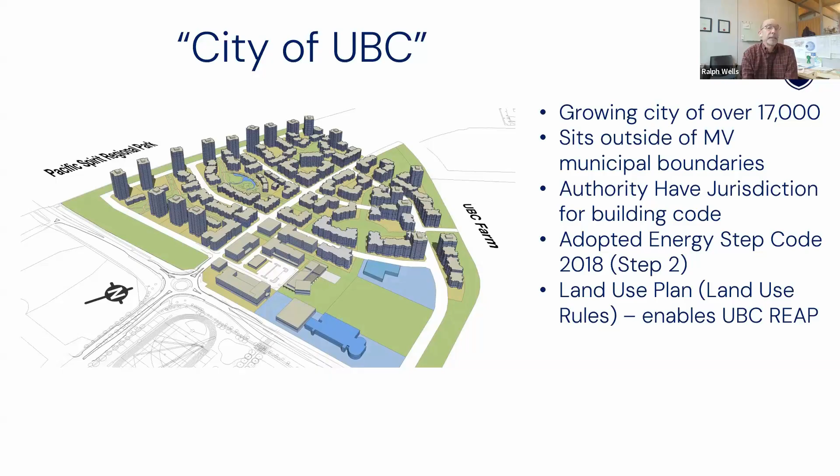First, just noting we are an authority having jurisdiction for building code, and very pertinent to today, we've adopted Energy Step Code. We adopted Step 2 in 2018. Then lastly, I guess this is the key point, through a land use plan agreement we have with the province of BC, we've been given municipal authorities through MEVA, the same municipal enabling legislation that gives other cities their authorities. But it allows us to develop something called land use rules, so we can go a little bit beyond building code, for example. And that brings authority to our development handbook, but most importantly for today, it brings authority to something we call the UBC REAP.

I'm not going to talk too much about REAP, but it's key for us. The Residential Environmental Assessment Plan is really a comprehensive green building system that governs construction of the residential community. It's very holistic though, LEED-like in terms of its comprehensiveness. We have a broad range of component areas here, ranging from biodiversity to climate adaptation, quality, health, and well-being, for example. And it is a regulatory tool, even though it looks LEED-like, and there's many preconditions as well as optional points that developers need to choose from to reach certain target thresholds.

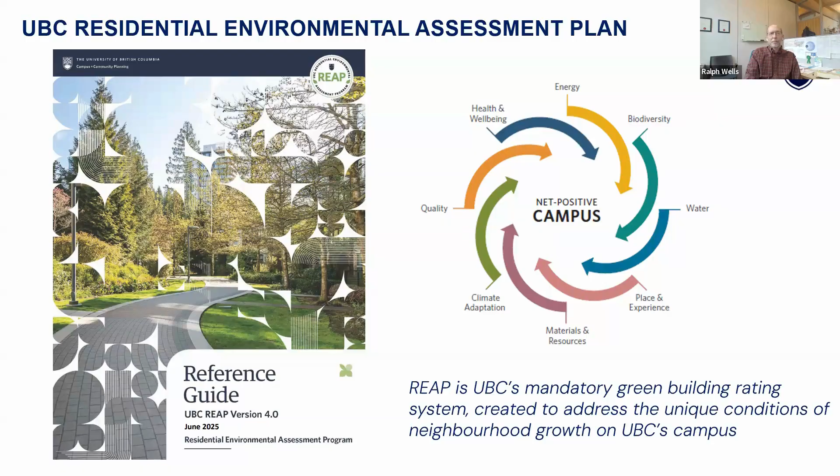But I'm not going to talk anymore about REAP as much as I'd love to. I encourage you, if you're interested, just Google UBC REAP and you can learn lots more about it. But the key part I'll share with you is on the next slide.

As I mentioned, we adopted Energy Step Code in 2018, and in June of 2024, we moved to Step 3 as our base code to stay ahead of the base code for the province. We also then in June 2025, just recently, adopted Zero Carbon Step Code EL4 for all new residential construction on campus. And here's the other key piece: because we're able to, through REAP, we've also introduced a 10% embodied carbon reduction target. So all new construction will have to meet that target as well.

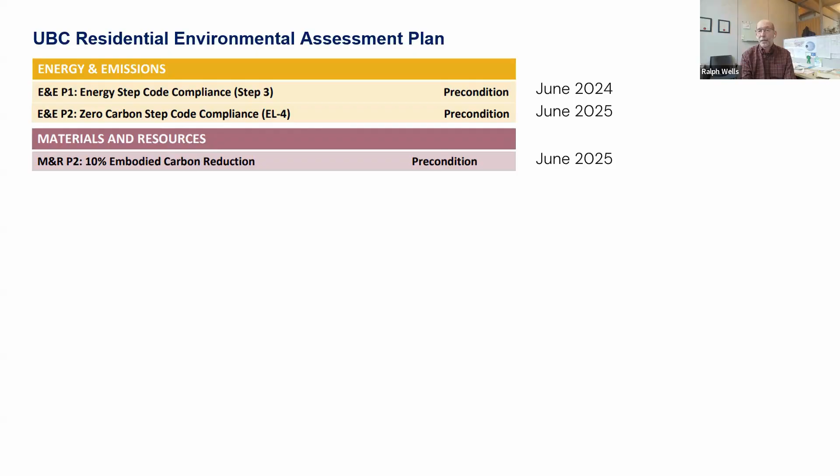And we're not stopping at 10%. That's where we're starting. Our climate action plan for the neighborhood commits us to a 40% reduction by 2030. And of course, UBC's climate action plan, like many jurisdictions, commits us to net zero by 2050. So even 40% is only a stopping point on the roadmap. All of that to say, we're really interested in the question of understanding the relationship between Energy Step Code, Zero Carbon Step Code, and embodied carbon reduction.

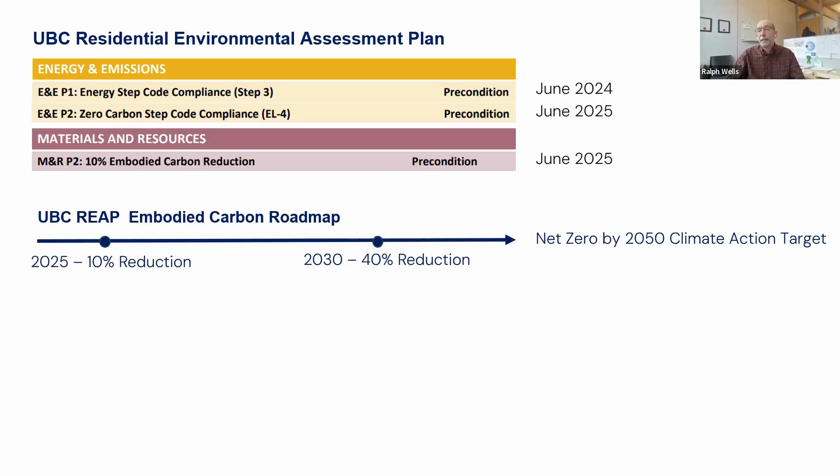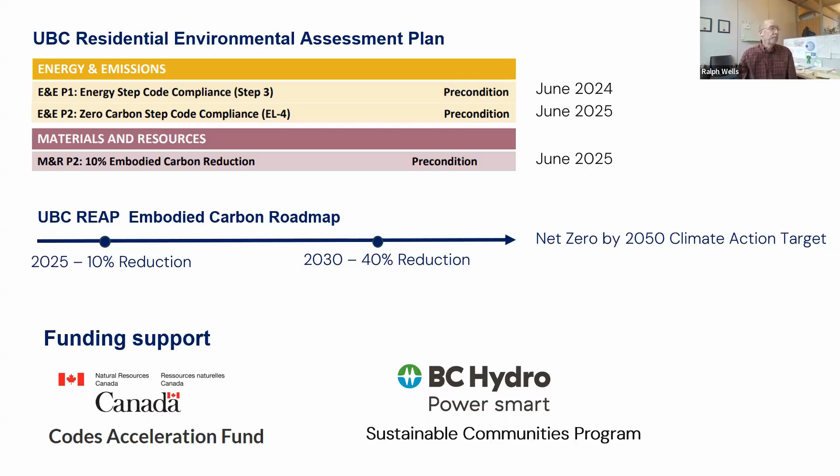And then finally, I just want to acknowledge funding. Very excited and happy that we were able to receive an NRCan Codes Acceleration Fund grant in order to explore these questions and develop our energy, zero carbon, and embodied carbon roadmap. I also want to acknowledge funding from BC Hydro, who are also very interested in understanding the relationship between energy efficiency, which is their core mandate, and embodied carbon. So that's the context. I'll hand it back over to Hugh, I believe, to take you through the fun stuff.

Sorry, Martina, we're still there. Yeah, my apologies. No worries.

So just to also put it into context of the current code landscape, also outside of UBC and the relevance of the study: for those who've been around for some time in this space, it has been a very rapid evolution of energy and carbon code adoption in BC since 2008, when we had our first ever energy code in BC, which was MNECB 1997. Lots have happened since that time.

But one significant milestone, I would say, is in 2017 when the BC Energy Step Code came into place. And with that came the TEDI metric, the thermal energy demand intensity, measuring the heat load on buildings. So what that did is really put a much needed focus on the thermal envelope for improving energy efficiency, and this has had a significant impact on our local industry practices for the better.

But what we're starting to see now on projects, as we layer in the higher steps of the BC Energy Step Code, Step 3, Step 4, the higher levels of the Zero Carbon Step Code, all-electric projects, and embodied carbon, we're starting to reach a point of diminishing returns, particularly on the TEDI metric. So what that means is we've found that aiming for low TEDI overall is starting to level out carbon impact if you look at it holistically, and in some cases, it's actually making it worse.

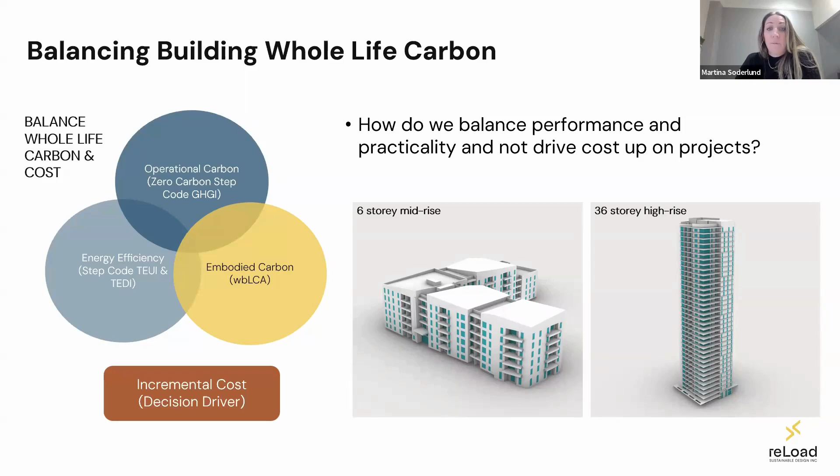So to help study that, we have looked at two MURB archetypes: one 6-story wood frame mid-rise and one 36-story high-rise concrete tower. We picked these two typologies because they are currently being built at UBC campus and are also part of their neighborhood plan development looking into the future. We also see these typologies built in the marketplace elsewhere. I do want to mention that these are not phantom models for research—they are rooted in real-life projects that were used as base case studies.

So just to give you a bit of a study orientation before we get to the results.

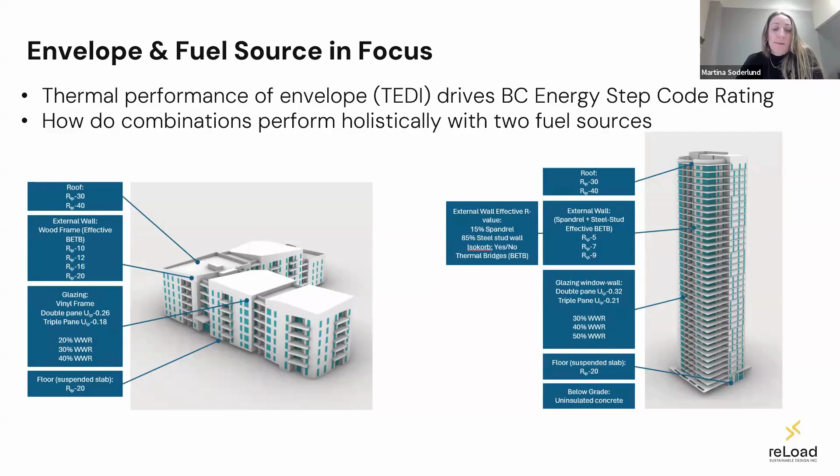We also wanted to see how combinations of the envelope perform under two fuel source scenarios. One is the hot water district system that is fully fueled by natural gas at the moment, serving the UBC neighborhood. The other is a low emission scenario with an all-electric system.

Just to give you a bit of an example of the level of detail we went into: this is the archetype 6-story wood frame example and the options of exterior wall assemblies we looked at. In total, we looked at 12 options, grouped into 3 categories top to bottom, and from left to right ranging from R10 to R20, with thermal bridge effect taken into account—a full-scale thermal bridging analysis. It was important to have the same thermal performance rating across the different categories so that we can compare options. The first group here is looking at hybrid wall assembly with cavity insulation and different levels of exterior insulation.

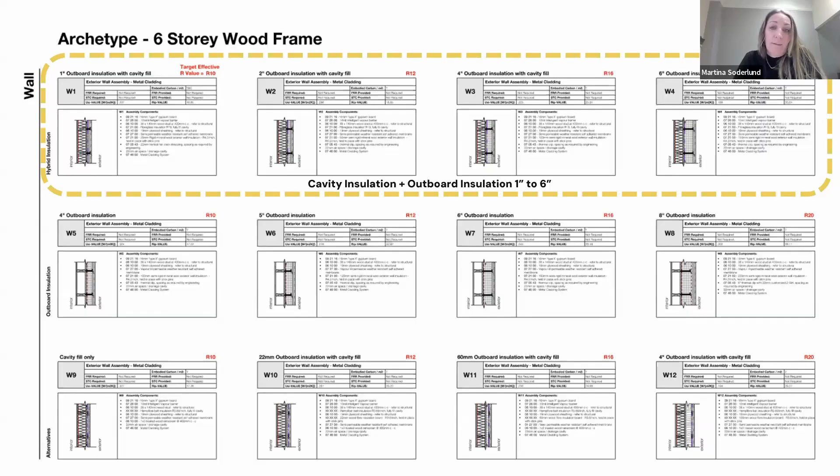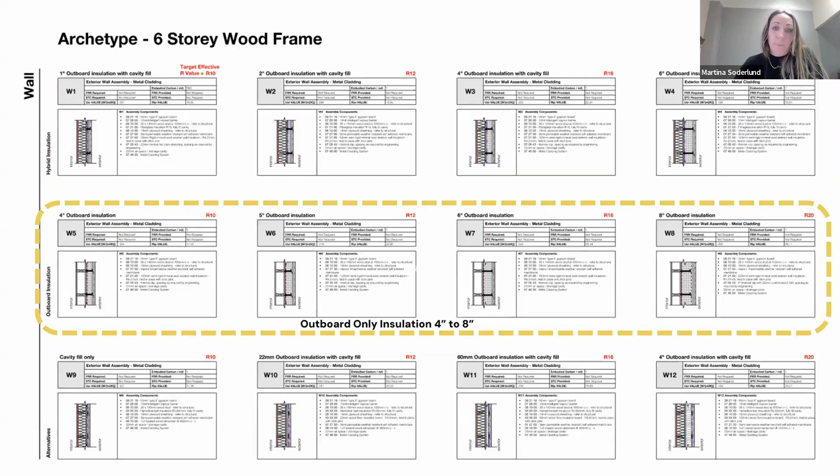Ranging from 1 inch to 6 inches of exterior insulation. The next group looks at exterior-only insulation—what if we remove the cavity insulation? To achieve the same R-values, we now have to look at thicker insulation, ranging from 4 inch to 8 inch exterior. The last group for the 6-story wood frame is what we call the alternative.

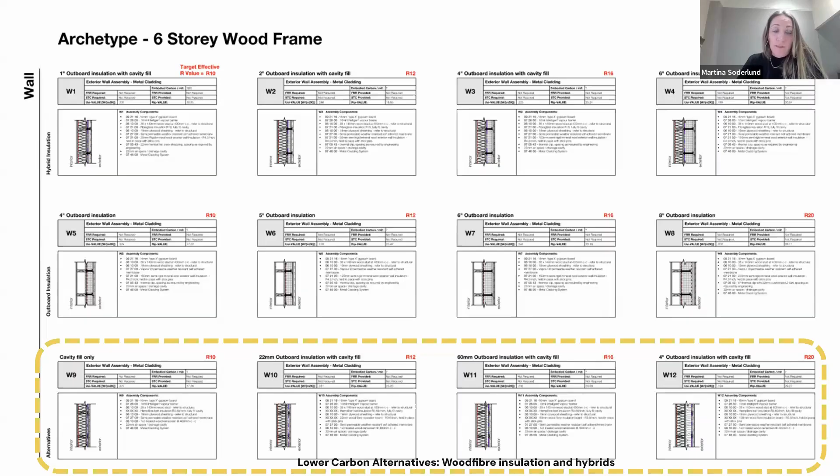This is where we try to also swap material options for more low-carbon alternatives. One guiding principle we had on this project was that we really wanted all solutions we looked at to be viable, code compliant, and available in the local marketplace. So we have not studied any very innovative materials in this category for that reason. But just to point out one example, we did swap mineral wool insulation for a wood fiber-based insulation.

We've run into a much higher degree of complexity, I would say, and options for the high rise compared to the mid rise when looking at material combinations to achieve certain R-values. The reason for that is that the impact of thermal bridging for this archetype is much higher than the mid rise and really de-rates the impact of insulation.

No matter how much insulation you start packing on, it's really challenging to achieve higher thermal performance.

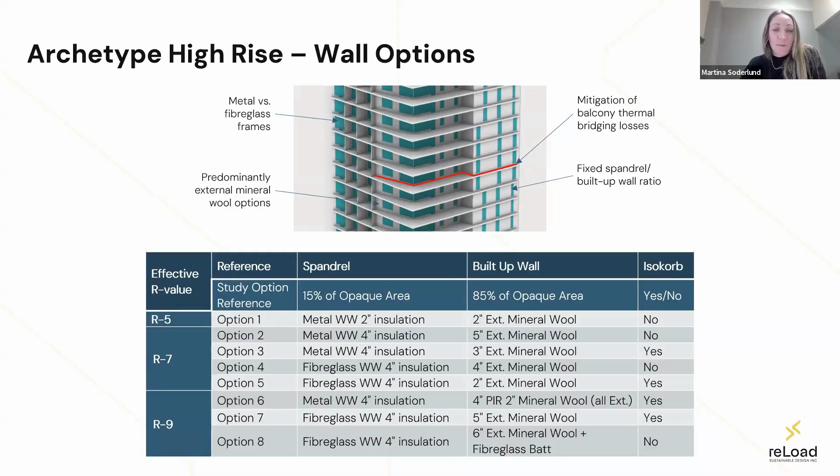But we were very interested in looking at material comparison for the window wall, comparing metal frame window wall to fiberglass. We were also really interested, because of the high degree of thermal bridging, to look at the impact of Isokorb, which is essentially a balcony thermal bridge system. We hadn't looked at that ourselves before from an embodied carbon perspective, and we knew it would also have an impact on the thermal insulation or thermal performance.

Just a mention about the extent of costing information: we looked at thermal envelope packages only in the study, and compared the incremental cost difference between those. All costs were provided by Heatherbrae Builders, and we did a net present value analysis over a 20-year period. To get a sense of the overall impact the thermal envelope has on the whole project compared to the whole project cost, we worked with the Altus Group Canadian Cost Guide for a MURB in Vancouver. So that's a bit of study orientation.

I'm now going to hand it over to Hugh to take us through the technicalities of the study.

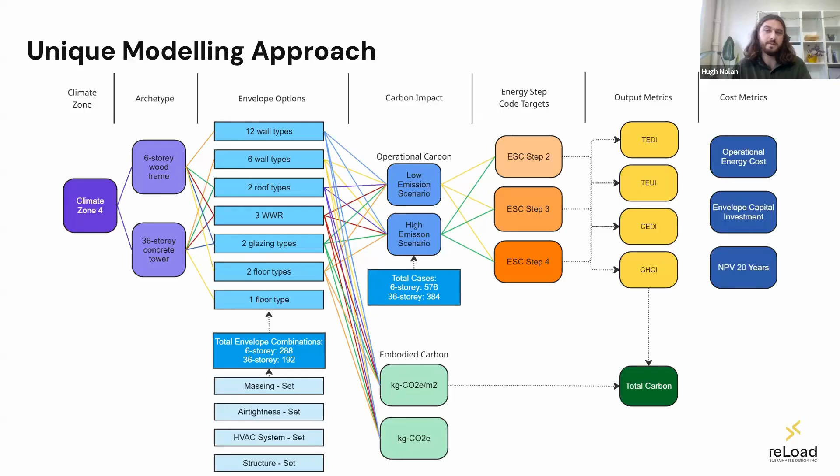Thanks, Martina. For the study, we wanted to use a parametric modeling approach, meaning we wanted to test every single iteration of these options against each other. The climate zone was fixed to UBC Vancouver campus, and we had 2 archetypes. For all of the envelope options, we tested all of the assemblies previously mentioned against each other, which resulted in 288 envelope combinations for the mid-rise and 192 for the high-rise.

The embodied carbon impact of each of these envelope combinations was calculated, and each was simulated using a high emission and low emission scenario, making the total number of cases studied 576 for the mid-rise and 384 for the high-rise. Each case was then sorted into its respective energy step code level, with all of the energy, carbon, and cost output metrics listed here to post-process.

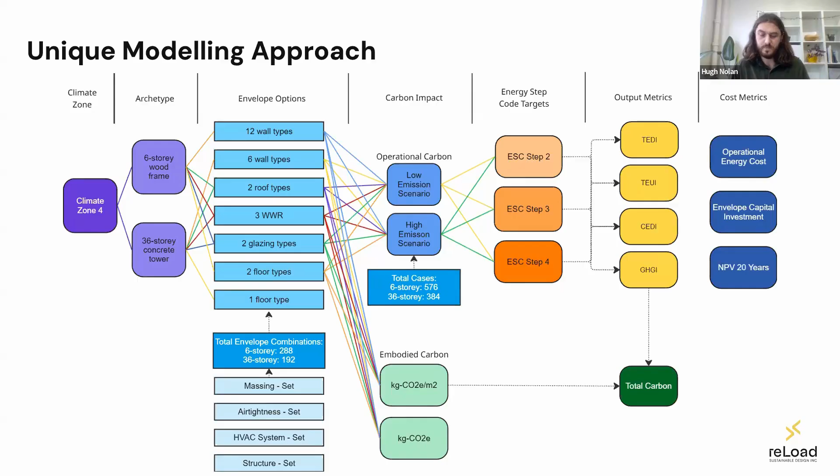As far as we know, there's no tool available to undertake this kind of parametric analysis for energy, cost, and carbon simultaneously. So here at Reload, we wanted to start developing our own. As Martina mentioned, we had started developing it a while back, and this is our first project where we really got to test it out on a bigger scale, which was really exciting.

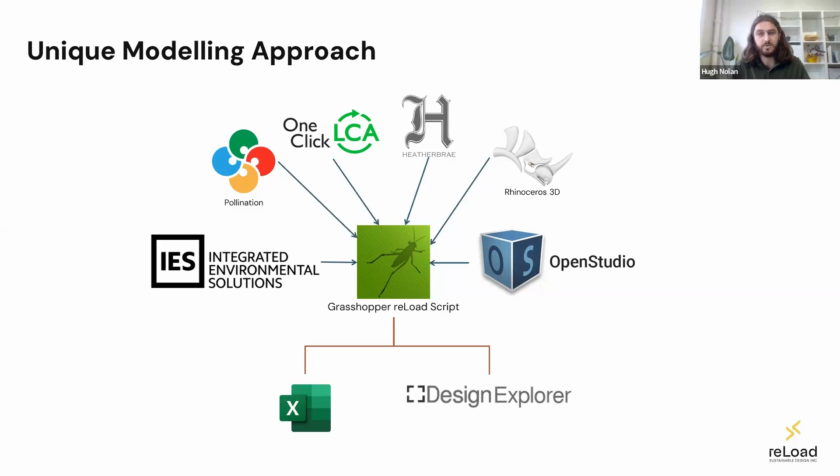We use Grasshopper to manage the energy simulations, the embodied carbon calculations, and the cost analysis in unison, pulling raw data from a series of different software listed here. The results were then post-processed using a combination of Grasshopper itself, Excel, and Design Explorer. Design Explorer is a parallel coordinates tool, which makes it easy to see the relationship between the key output metrics.

So, trying to quickly and concisely summarize all of the data we have, I'll start with a quick overview of the results and what we're going to talk about, and a reminder of the main questions we wanted to study. We're looking at carbon, embodied and operational, for each of the archetypes.

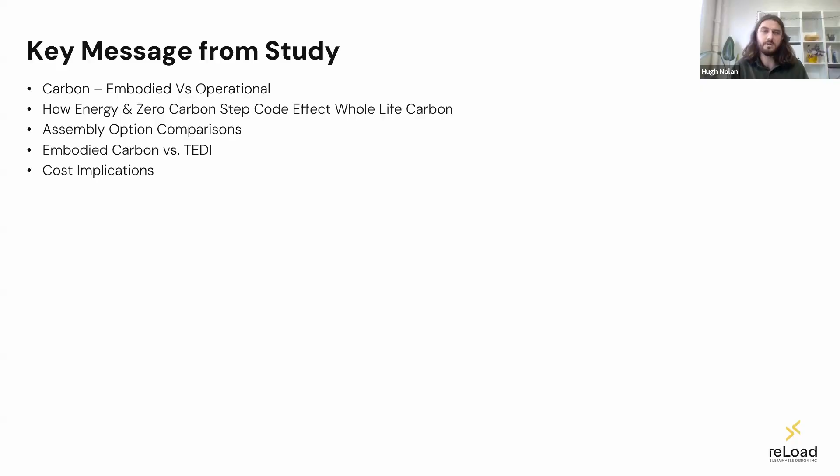We want to see how the energy and zero carbon step codes will affect the whole life carbon. Then we'll do a deeper dive into the assembly options and see how they compare against each other for the different archetypes, focusing on embodied carbon versus TEDI, TEDI being what is driving the step code levels for the study. Then we'll do a quick review of the cost implications of all the cases we looked at.

So, to open with a quick example of what the parametric modeling approach looks like and what it yields in terms of results for the analysis: it helps give us a full spectrum of results for any of the key energy, carbon, and cost metrics that may inform design decisions, allowing us to see the relationship between the outputs and in turn try to find an optimal balance point. For example, I've shown the mid-rise results here, and we can see that the majority of combinations meet step 3. But let's say you're in a jurisdiction required to meet step 4, and you want to achieve a minimum whole building LCA from that.

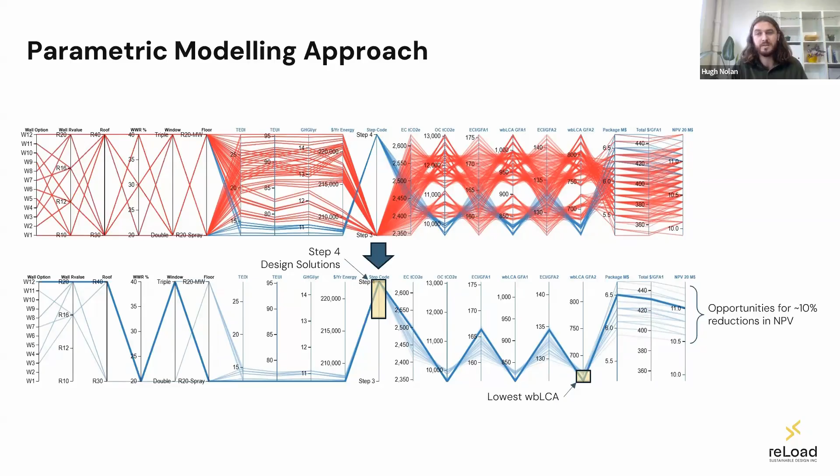We can see if we filter to those 2 options, there are still countless cases that perform very similarly, but greatly impacting their present value. So just in general, it's a very useful tool for leaving no stone unturned. I suppose it also just puts into perspective that there's no one perfect combination or formula for any of these answers. It's rather finding an optimal balance point depending on what key design options are most important to you.

So to focus back in on the study, here we're just going to have a quick overview of the embodied carbon breakdown for both the mid-rise on the left and the high-rise on the right. The ranges represent all of the cases that we've looked at, so all the different combinations. And we can see for both archetypes that the embodied carbon is pretty dominated by the structure and parkade, neither of which we actually analysed within this study. But you also definitely can't ignore it if you're trying to reduce your carbon footprint.

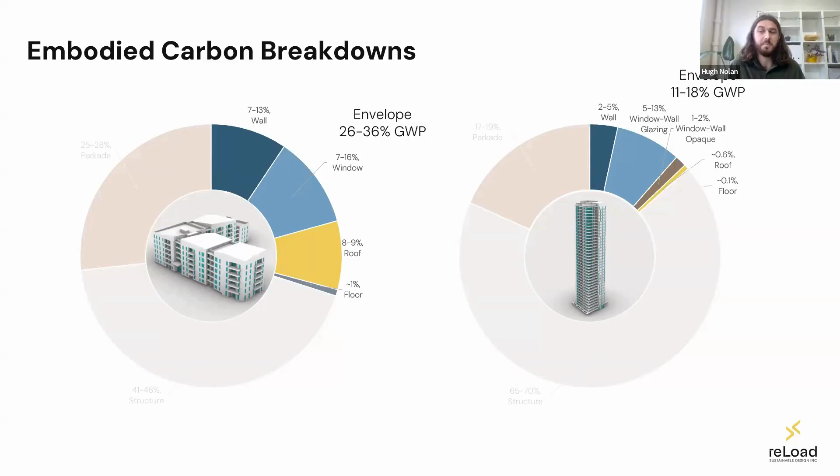So for the study, we did look at the envelope only, as that's what's affecting the thermal performance and in turn the operational emissions. For the mid-rise, the envelope accounted for between 26 and 36% of the whole building carbon, whereas for the high-rise, it only accounted for about 11 to 18%, as the archetype is a high-rise concrete tower, so it's been dominated by that structure.

In terms of energy impact from the study, we focus on the thermal envelope as it's what's mostly affecting the heating portion of the total energy. The low emission scenarios at the top here, we can see that the space heating is accounting for roughly 10 to 15% for both archetypes, give or take. For the high emission scenarios, however, it's closer to around a quarter of the total energy. That jump in scale is a result of using a heat pump system for the all-electric low emission options with a COP. Whereas for the high emission scenarios, it's natural gas, so there's no COP.

The domestic hot water for both scenarios was assumed to have a COP of 1. So the energy will not be affected by the study. However, the fuel switch to natural gas for the high emission scenario would have a great impact on the operational carbon in terms of domestic hot water. So just try to put that impact into perspective.

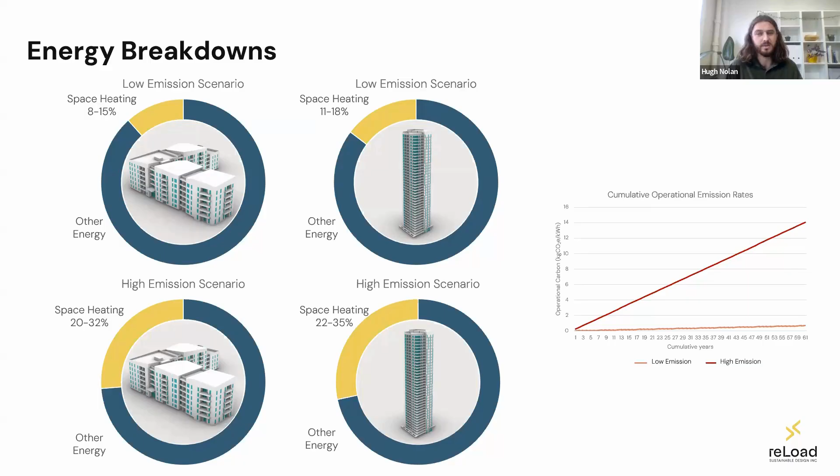We have the rapidly increasing difference between the high emission and low emission scenarios for the study over the 60-year period that we looked at. So the y-axis shows the cumulative emissions per kilowatt hour of energy, and the x-axis is the 60-year timeline year by year. So I suppose in reality, we would hope that the high emission scenario should start to plateau over time as the grid is supposed to decarbonize. But for this study, we just assumed it remained consistent throughout the 60 years, with the idea, I suppose, that if it were to decarbonize, it would fall somewhere between the range of these 2 scenarios.

So here we're just going to have a high-level review of what impact the BC Energy Step Code levels can have on whole life carbon emissions, as well as the zero carbon step code. So to start, we have high-rise on the top and mid-rise on the bottom, the percentage of cases that were studied and how they fell into the different buckets of step 2, step 3, or step 4. For both archetypes, the majority of envelope combinations resulted in achieving step 3, demonstrating that only the highest thermal performance cases were enough to meet step 4.

Only the high-rise had cases that met step 2, all of which had large window areas and poor opaque wall performances. I suppose in UBC, we don't really see any residential high-rises with a window-to-wall ratio greater than 50%, which was the maximum studied. However, within a more general market context outside of UBC, it's not that uncommon to have higher glazing areas, which would likely result in an increase in step 2 options.

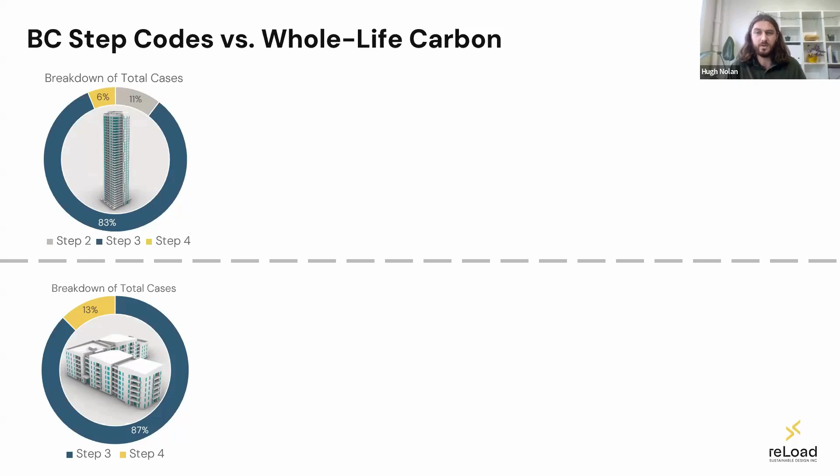To try to capture what the steps mean from a whole life carbon perspective, we've taken the lowest calculated embodied carbon for the lowest step achieved. So that would be step 2 for the high-rise on the top left and step 3 for the mid-rise on the bottom left. And we're also looking at the highest embodied carbon scenario for the step 4 cases for each archetype.

The operational carbon shown here is for the high emission scenario over the full 60-year period that was studied, which is clearly dictating the whole life carbon emissions. In both archetypes, the higher step code levels driven by that TEDI metric result in big carbon reductions from a whole building LCA. However, if we take the exact same cases and switch to the low emission scenario, the relationship between embodied carbon and operational carbon completely flips.

So the absolute value of the embodied carbon in the gray here remains the same between the large and small donuts. However, now it makes up about 80% of the total emissions from a whole building LCA. So in this instance, the lower steps have a slightly lower whole building LCA result, but the difference is pretty marginal. So if we look at a combination of how it's all looking for both scenarios, it's worth noting that the best and worst cases are used here to really try to capture that full spectrum.

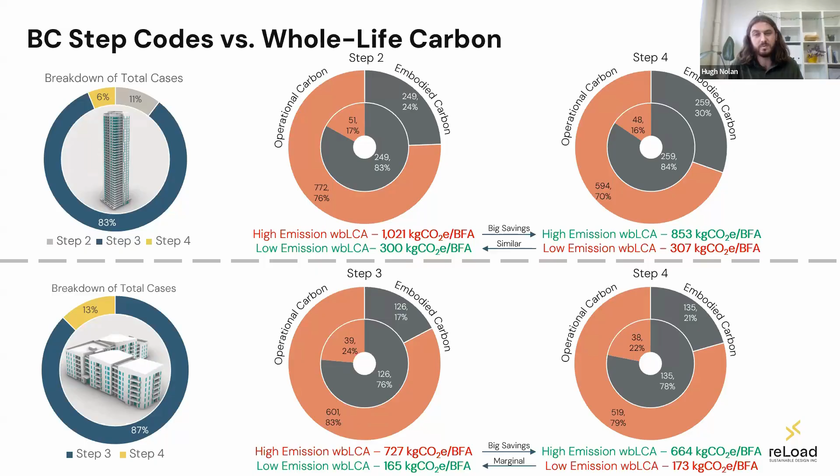In both mid-rise and high-rise, there are many step 4 cases that achieve a lower embodied carbon than step 2 or 3 counterparts. The low emission scenario just really helps unlock that freedom to focus more on material choice and quantity to optimize your whole building LCA.

So to emphasize that point, we're now going to look at some mid-range step 3 options from the high-rise. The table on the right highlights the layered choices of that opaque wall option that Martina previously discussed, mainly a variation of window wall frame material, insulation thickness, and the balcony thermal bridge mitigation using Isokorb. The graph shows the embodied carbon impact of the building envelope only, so excluding any of the structure or parkade that was previously shown. And the secondary axis is the operational emissions over the 60-year period for each case,

using the low emission scenario. So as we can see, all the cases perform very similarly in energy performance and operational emissions. But the combination of assembly choice, window-to-wall ratio, and glazing performance greatly impacts the embodied carbon. So the fiberglass frame window wall options are beneficial from both a carbon and energy perspective, allowing for a reduction in insulation materials to meet the same envelope thermal performance. The mitigation of the balcony thermal bridges does help to reduce the embodied carbon, but can be a costly decision. In general, we can also see that the window wall frame material and window area are what are driving the carbon for the high-rise.

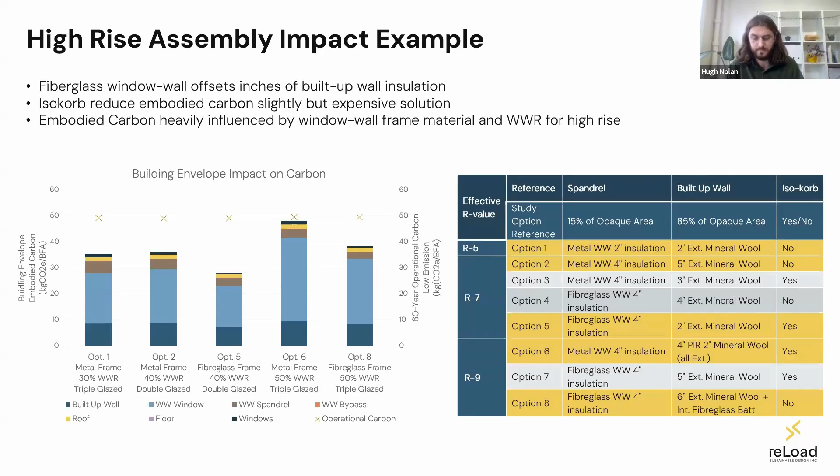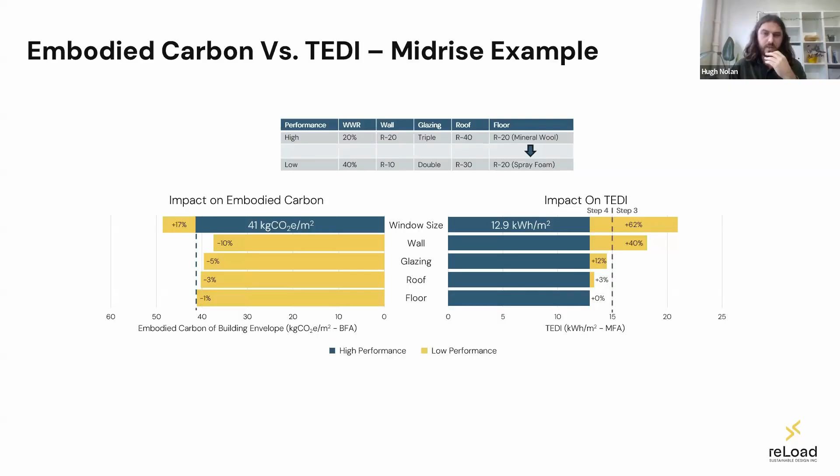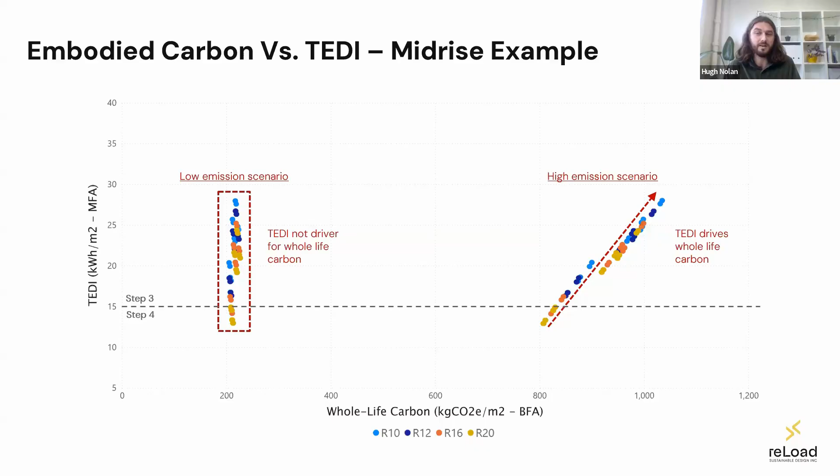I suppose it's also worth pointing to the step 4 dots in the low emission scenario here on the left. There are plenty of options that are achieving a lower whole life carbon than a lot of the step 3 cases above, which just reiterates the point we're trying to make earlier that a higher step doesn't automatically mean higher carbon. It really depends on how you're designing it.

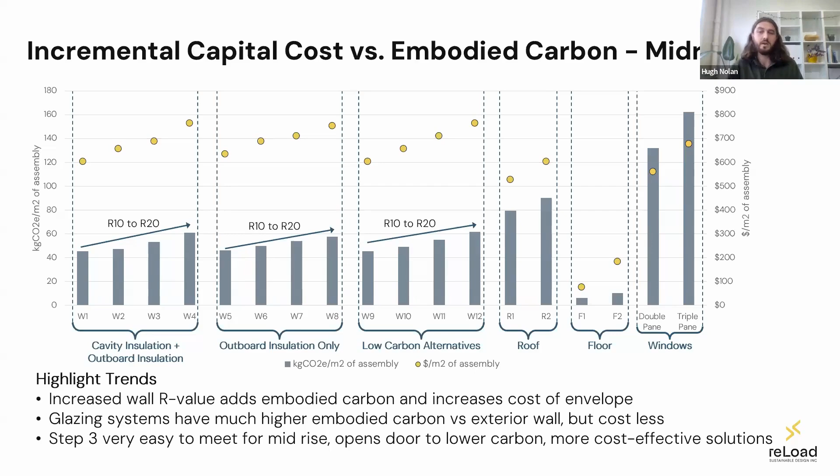A reminder that all the mid-rise options we looked at were achieving step 3 minimum. Again, just to touch on that, there is room for design optimization to save on cost and carbon while not greatly affecting the overall operational costs.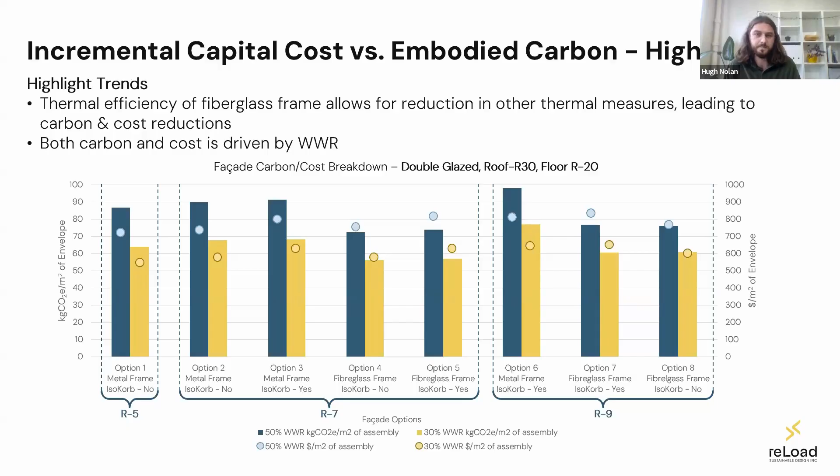I suppose to wrap up the results section, I'm just going to zoom back out on a macro scale and look at how the respective energy step code levels for the high-rise options studied perform from a net present value perspective. So again, the net present value is the capital costs of all the envelope measures, as well as the annual operation costs over the 20-year period.

So there are more layers, I suppose, as we're pointing out—more layers for the annual cost of each scenario, such as fixed annual connection fees and stuff, which may differ from study to study or depending on where your building's located. But we do believe that the annual saving benefits from an all-electric heat pump system would remain compared to a direct natural gas system.

In either emission scenario, the annual savings from higher step code levels generally yield a lower NPV, meaning if you do have the capital investment available, it is more beneficial in the long run to invest in a more robust envelope and aim for that higher step. It's also worth remembering that the envelope is only a small proportion of the overall construction costs, and it's unlikely to massively increase project budget overall.

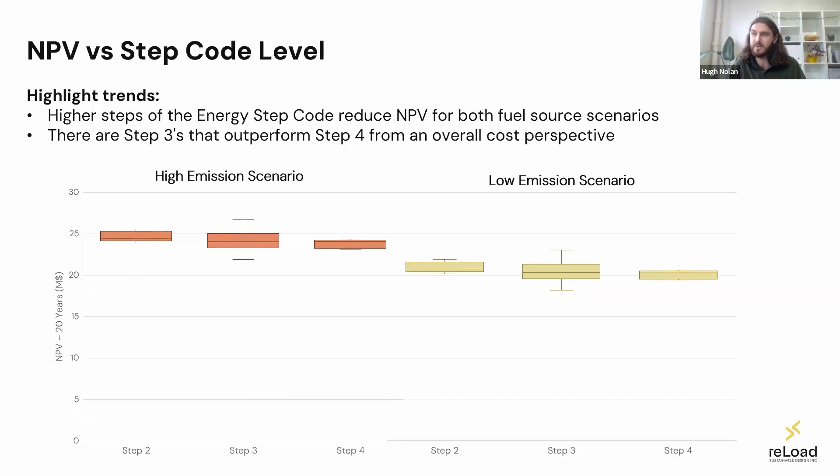All right, so we're just going to wrap up here with a few summary findings and some considerations to bring us into the discussion section. So just to zoom out for a minute from all the details and the numbers, I wanted to recap on some of the bigger picture findings from the study.

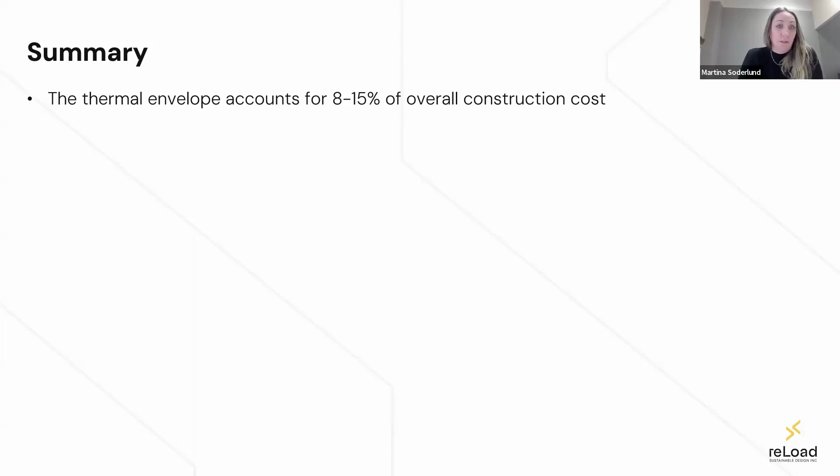Compared to overall average construction costs for these MURB archetypes, the thermal envelope accounts for 8 to 15% of overall construction cost.

For embodied carbon, the same thermal envelope accounts for 11 to 36% of the total embodied carbon when you consider envelope and structure. I do want to point out that these ranges are not the step from going from step 2 to step 4. This is the range to capture all the scenarios we looked at, which is a mix of step 2s and step 4s in there.

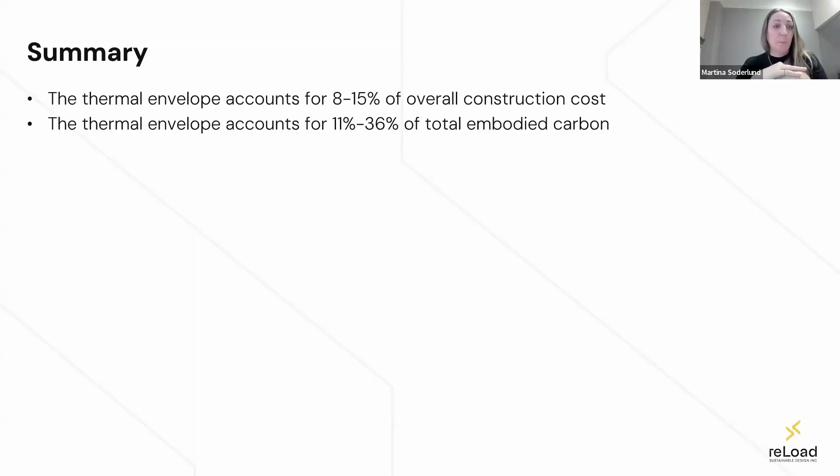The higher range of the embodied carbon here, the 36% range, is for the mid-rise, where we saw that the thermal envelope has a bigger piece of the embodied carbon pie than the high-rise, due to the concrete structure that has a bigger impact on the high-rise.

We found that there are step 4 thermal envelope solutions that are more cost-effective than both step 2 and step 3. And similarly, we found that there are step 4 envelope solutions that have lower carbon versus step 2 and step 3.

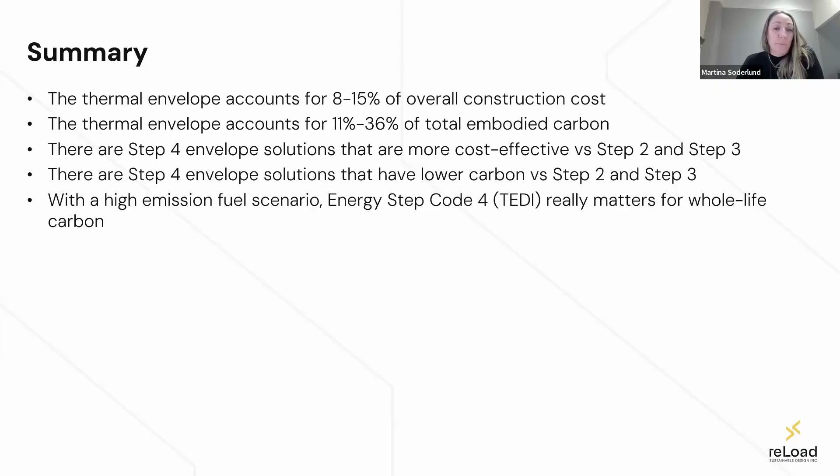One of the big takeaways we found in this balance point between step codes, zero carbon step codes, and long-term whole life carbon is that with a high emission fuel scenario - the gas-based fuel scenario for heating - energy step code 4 with the TEDI really matters for the building's whole life carbon. The envelope has a really big impact on whole life carbon over time.

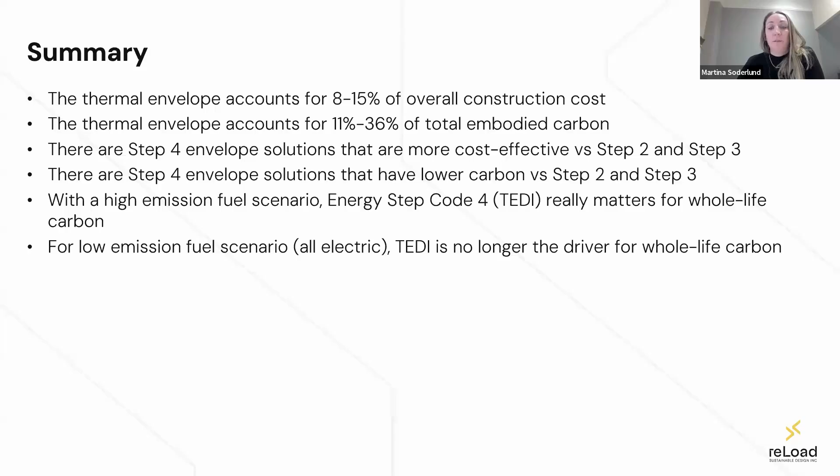But for the low emission fuel scenario, the all-electric TEDI is no longer the driver for whole life carbon. And the balance is now swayed towards more focus on materiality than thermal performance.

So what does this all mean? Bringing it back to the code aspects we talked about in the beginning - some of our key findings and recommendations from this: do not compromise on energy efficiency. Regardless of the fuel source, a low energy use intensity or low energy consumption equals low energy cost, which is really important for affordability and equity over the long term.

Do not compromise on low operational carbon. The higher levels of the zero carbon step code are really, really important in mitigating the climate change impact that the building sector has.

Consider relaxing the TEDI target in the step code for EL4 buildings. This is a really important point we want to highlight - while we really support TEDI, having that absolute number of 15 is becoming a bit problematic when you're juggling all these aspects. Having flexibility on that when operational carbon is low from the systems really leads to more flexibility in design options that can also lead to cost savings.

Maintain step 4, the high level step code for EUI and TEDI, for the high emission scenario. The thermal envelope really matters when you have that as a fuel source.